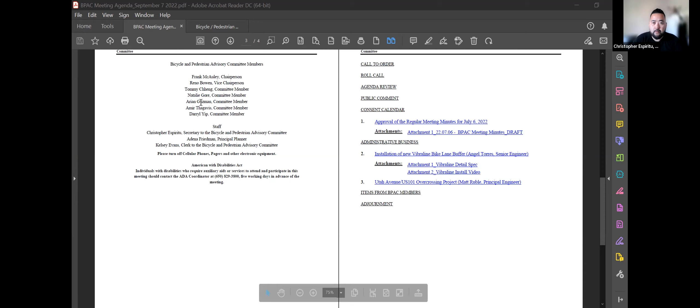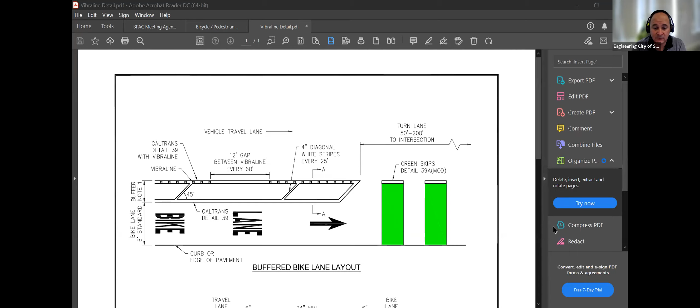So while Christopher's working on that, I just want to start by introducing myself. My name is Angel Torres. I work with the Department of Public Works Engineering Division. I'm working on several pavement rehab projects throughout the city of South San Francisco at the moment. There's one project in the Westboro area right now that we're trying to wrap up. We've completed all the paving, and we're in the middle of reviewing the alignment for the new striping along Junipero Serra.

Everything else on that project has already been striped and completed. And so this entire section of Junipero Serra between Avalon and Hickey, that is within the city of South San Francisco right of way, is going to receive this particular detail that you see here that introduces what we call Vibraline. We're introducing it on areas where we had previously a bike lane that did not have a buffer, and so we're adding this buffer between the number 2 lane, vehicle lane, and the bike lane. This buffer is just to kind of separate vehicles from bicyclists as much as possible.

In areas where we don't have the real estate to install the buffer, we'll go back to the standard, which is just the 6-inch white line. But in this particular case, we're going to be adding the Vibraline detail, which is the 4x4 squares. This product is not like an adhesive-held pavement marker or anything like that. It is the same material as your standard thermoplastic that is placed at a stop legend, limit line, or crosswalk. So it's the same material, just a little bit more dense, and it's applied over a 6-inch line. So the squares are 4x4 applied over a 6-inch shoulder line.

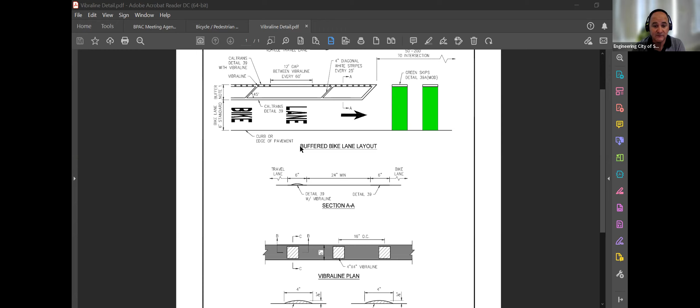Some of the key reasons why we went with this particular item is that we were looking for something that was going to be low maintenance. We've had issues with adhesive markers popping out, and we're paying to try to keep up with maintenance and reapplying them, and they're not cheap either. We have also considered the Caltrans type of, what is it called?

Rumble strip detail, which has been applied by other agencies in the buffer zone. For example, Brisbane has applied it along Bayshore and also the street that goes up the hill, up the canyon. We looked at that, but we were more concerned that if for some reason it was not accepted, it's a very costly procedure to remove once the pavement has been ground out.

If this particular product here, for whatever reason, starts to fail, or vehicles or residents don't like it, we can easily grind the thermo and reapply just another 6-inch thermal line in its place. So that's a very inexpensive fix, should for some reason this product not be welcome once it's been applied.

We also considered surface-mounted delineators, but the feedback we got from maintenance and other people is that they are dangerous in that bicyclists have a hard time maneuvering through them. I'm not an avid bicyclist, but I do ride my bicycle here and there, and just trying to dodge the delineators can be a problem. I know they work great for the vehicles, to try to deter them.

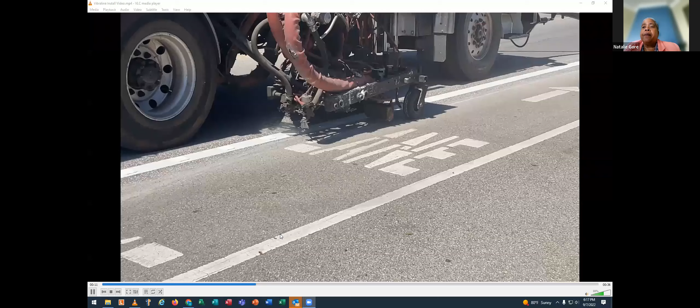Great, thank you. I had a question - I think that's an improvement from what we have currently. I would be interested in knowing how quickly, if we get the grant, we'd be able to upgrade to Class 4. The only question I had is Junipero Serra is one of our streets that has a higher speed of travel for cars. I'm concerned especially at the intersections where a car might be turning right, how we're going to handle the striping for that area, to make sure there's no possibility a car might veer into the lane at that point, or to make sure that both cars and bicyclists are aware that lane should be shared by both of them.

Is the question geared towards the Junipero Serra application or another location? The Junipero Serra application. So as part of the project, we are introducing the green transition zones as part of the bike lane improvements.

This is a pretty standard detail now for areas where vehicles and bicyclists have the potential to interact or meet. Some installations you might have seen around town are applied at commercial driveways. For example, on Airport you'll see that application with the skip green. We're doing similar at these intersections.

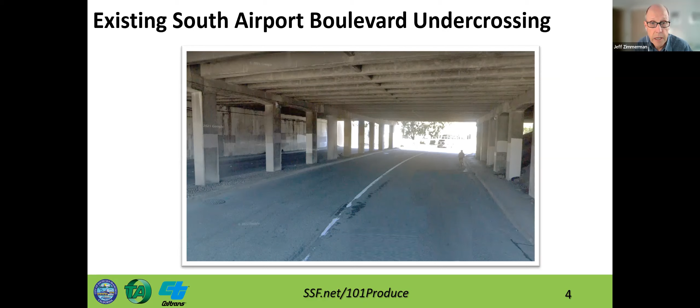So the project purpose is to provide an additional local east-west connection across US 101, in addition to the 3 existing crossings in South San Francisco, that would benefit all vehicles, pedestrians, and bicyclists. And it would accommodate planned growth in the city of South San Francisco and in the project area.

The alternatives that were considered, I don't have as much detail here as we had in the public meeting, but basically there was a background of looking at a number of alternatives that were various interchange configurations. The project settled into a build alternative that was basically a new US 101 overcrossing at Utah Avenue, South Airport Boulevard, that would connect to San Mateo Avenue. I'll show you an image of that in a moment.

Local intersection improvements are included in this, and the intersection improvements include pedestrian and bike facilities. They're all class 2 facilities for bikes. And then there's an additional lane that's proposed in the northbound direction on San Mateo Avenue that would utilize the parking space. It wouldn't widen San Mateo Avenue, but it would utilize the existing on-street parking, convert that over to a bike lane in each direction.

The no-build alternative is also considered in the EIR EA, which basically involves no modifications to Utah Avenue or any of the intersections on it.

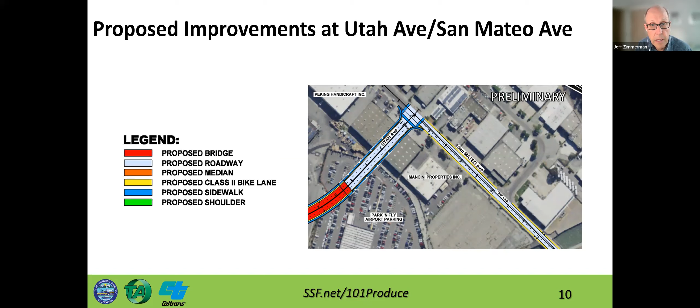This is a close-up of the intersection at South Airport Boulevard. This shows Highway 101 just on the top of the page, and Utah Avenue coming in here to South Airport Boulevard. The new leg of the project would bring Utah Avenue extending to the upper part of the page into the overcrossing and then over to San Mateo Avenue.

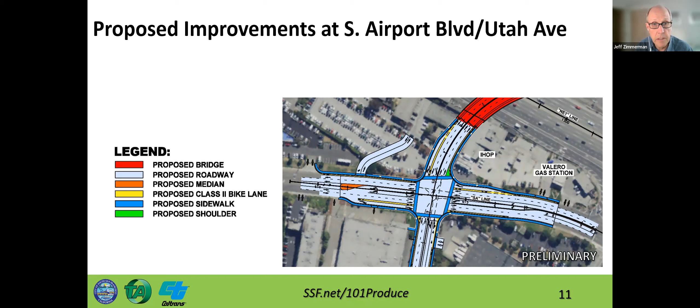There are some impacts from this project from right of way that are taken here at IHOP and the Travel Lodge and other locations, but I won't dwell on that given that this is more of a bike and pedestrian meeting.

We've gone through from 2017 to 2022 the environmental studies and engineering studies that were necessary, an environmental review that was documented in coordination with Caltrans as the lead approving these things.

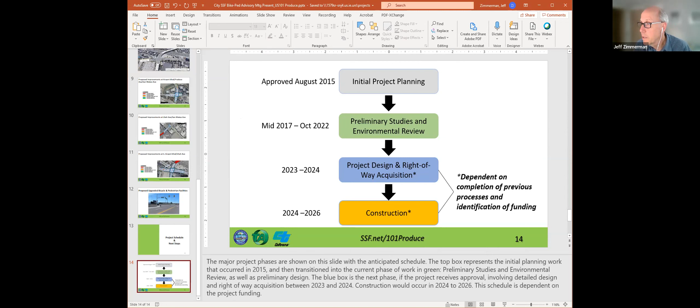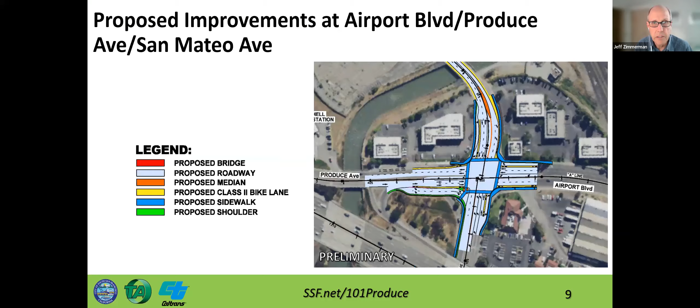Sorry, are you seeing the slideshow right now? We're seeing slide 14 right now. I think if you were to go up. Okay, got it back. Sorry, my technology skills aren't what I'd like them to be here. So let me see, there's this slide. Were you referring to this slide here? Number 7, I think. Let me go back, previous one. This is the aerial view. Yeah, okay, so do you want to repeat your question on that?

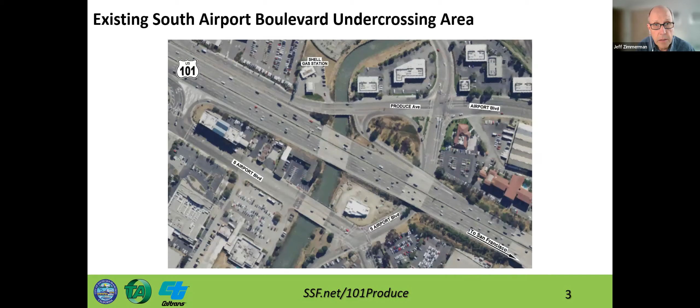Is this new part south of the train overpass? Let me go back to this picture... sorry, that one doesn't show the same view. Let me walk you through it.

South Airport Boulevard exists along here already, though there'd be some widening. The new part starts from South Airport Boulevard, goes up and over, and connects with San Mateo Avenue. The new overcrossing would be along this portion. The part in red is a bridge, and the part in gray, beginning at South Airport Boulevard and extending over to San Mateo, is on retaining wall fill.

Okay, so I see it's near the Travel Lodge. I'm still having a hard time picturing where this is. So it's near the Travel Lodge, meaning it's going over... it's going over produce and over the entrance to the highway going south as well.

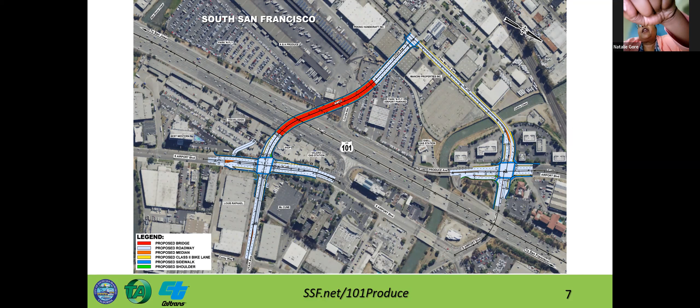So it's elevated over US 101 in this area, that entrance, which I think is produce. Correct. At the Travel Lodge facility you just mentioned, it impacts part of the right of way, the property at the Travel Lodge, as well as the adjacent IHOP restaurant. So it goes over there, and then on the other side, south of the entrance to the highway.

Okay, I think I have an idea where it is. So I'm trying to see how that's going to be useful as a bicycle connection, maybe from downtown. Is that a newly constructed road here, or does that road already exist?

The only new road portion is the Utah Avenue extension, as it's been called. That's the portion that goes over the highway and connects between San Mateo Avenue and South Airport Boulevard. I don't know if this slide shows it better, but this is a different view. This portion where it takes off from South Airport Boulevard is the new elevated portion of the proposed project. Up here where it says San Mateo Avenue is where it connects to the existing San Mateo Avenue.

So the portion over the highway plus its connections are all new. The rest of the facilities you see here already exist. There would be some elevation changes with South Airport Boulevard, for example — it's raised about a foot or so just to match in and provide the conforming structure needed on a vertical profile. So there are some changes to elevation here, but nothing very significant.

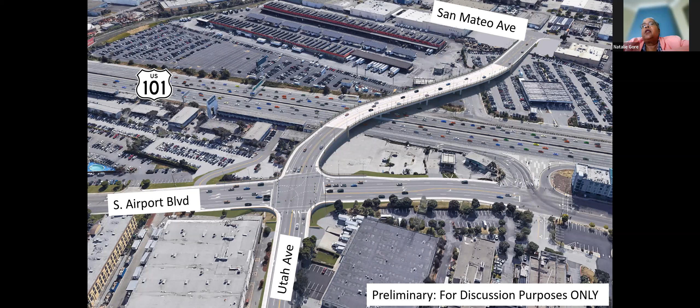So there's not likely to be much pedestrian traffic going over the highway, right? It's mostly bicycle and car traffic planned, or will there be sidewalks? Yes, there will be sidewalks all the way across — all the facilities shown would have sidewalks on each side. So the overcrossing and its connections would have continuous sidewalks on each side, and there would also be class 2 bike facilities provided.

Will those sidewalks have guardrails? I can't tell from this rendering. There'd be guardrails on the outside, yes. But I mean between the sidewalk and bike or car traffic. I don't think that's proposed. There will be a barrier on the outside of the sidewalk, but between the sidewalk and the class 2 bicycle lane, typically it's just a sidewalk with a curb and gutter.

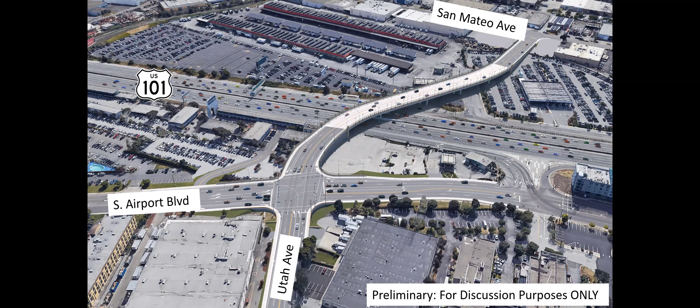But that's something Matt discussed — this is conceptual, and we'll be looking at a class 4 bike facility and the details in the next phase, if the project is approved to move forward.

Yeah, I'd be curious how the cyclists, the frequent cyclists here, feel about that. I feel like often these bridges usually feel pretty hostile to travel across as a cyclist. Probably one of the more convenient or nicer ones is going over the Golden Gate, although that's usually mixed bicycle and pedestrian, but it's guarded enough from vehicle traffic that you feel pretty secure. So I don't know, to the extent we actually want cyclists to use it versus just be a nice convenience for cars, I'd be curious whether the cyclists here feel like that seems sufficient.

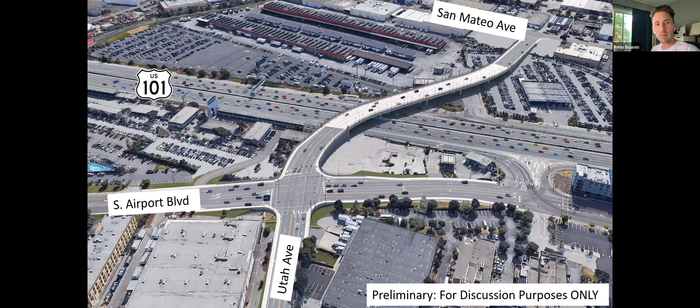I think that Class 4 is pretty important over the bridge. I agree that unprotected bike lanes on a bridge like that can definitely be challenging.

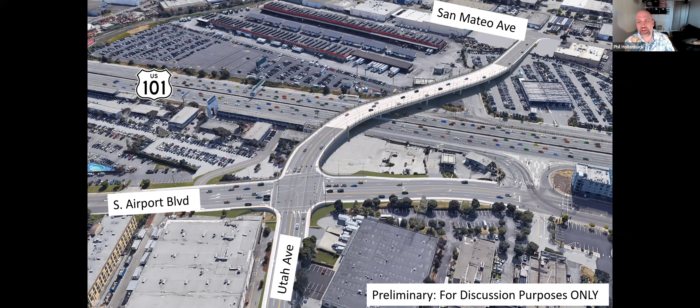Can we go back to the other image we were looking at? Yeah, the top down, the aerial here. So it seems to me the general idea, when also answering Natalie's question, is that if you're biking south on Airport Boulevard from downtown, whereas now you would turn left on South Airport Boulevard and go under the existing underpass, you could now turn right, travel down San Mateo, and then use this bridge to cross instead. That's correct, that's the general idea.

And will there be any improvements to the existing South Airport Boulevard undercrossing, or is that out of scope for this? That's not proposed. The intersection there is where you see the light blue-gray color, that's the proposed part of the project. There wasn't anything proposed under the undercrossing, basically because of the limited room available there.

Right, and just to clarify Jeff, for BPAC's reminder: we had the PS Office Park projects, the 124 Airport project creating 480 housing units, plus the 40 Airport project creating another 290 housing units. Those projects are tasked with improving pedestrian access and circulation. So these concepts you're seeing, included as part of this project, took into account all of these things happening, which have actually already happened.

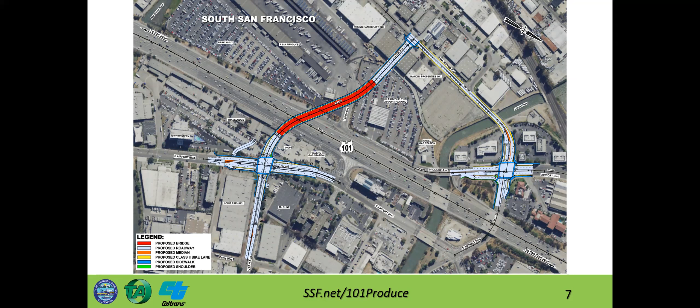Okay, sure, you'll probably answer my question as well. First of all, I want to thank you for presenting this. I went to the environmental review public meeting and asked for this to be taken to BPAC, so I appreciate you taking it to BPAC. It's just unfortunate that the deadline for the environmental review comment period has already passed, because I think if this BPAC had known that the environmental review made a lot of very faulty assumptions in its analysis, we would have been able to take a stronger stance on it.

While I was pouring through my environmental review comments, I was looking through the entire environmental impact report, state laws, and other things, and I came to the conclusion that I don't think the city has its priorities straight with this project. It's spending hundreds of millions of dollars to provide convenience to automobiles in a place where there's not really a lot of pedestrian or bicycle activity, and it's just putting money in the wrong place.

So I actually wrote an email to BPAC, and then I realized it probably violates the Brown Act, so I'm going to read it here since this is a public meeting. I'm sharing my public comment letter on the DEIR for the US Highway 101 Produce Avenue Interchange Project, which would expand Utah Avenue and an interchange at Produce Avenue. In contrast to state law and CEQA guidelines, the DEIR falsely claims no impact on increasing vehicle miles traveled, leading to faulty conclusions on environmental justice, air quality, climate change, and consistency with local and regional plans. The EIR has 19 pages justifying level of service as the reason why they want to do this project. However, SB 743 prohibits level of service from being considered an environmental impact.

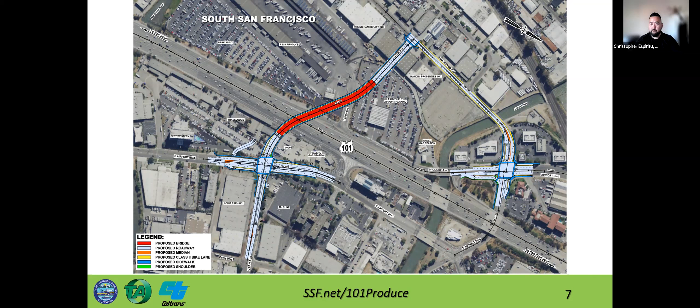That was really thorough and informative. Thanks for that. Yes, good research there. And I submitted my public comment for the EIR yesterday, so hopefully you have a record of that.

Okay, thanks Daryl for that. I did want to double check again with Jeff and team on timelines and next steps for this review.

Sure, I'll jump in on that. The timeline we have is that there's federal funding available for the project. The city's very interested, obviously, in helping if that's available, to help with the project if it moves forward, and that expires in the coming months. So the objective is to go through the environmental document, and we're at the response to comment stage on it right now. Caltrans is the lead agency, by the way, for both CEQA and NEPA, so all the work is directed by Caltrans and reviewed with oversight by Caltrans. We are the consultant for the city, but everything goes through both the city and Caltrans.

So we now would take all the comments that were received on the document, and respond to comments. Then I think the schedule on this is to look at - if the project is approved, it would go through a Caltrans decision process. They'd look for input from the city on this, and that would be done in October.